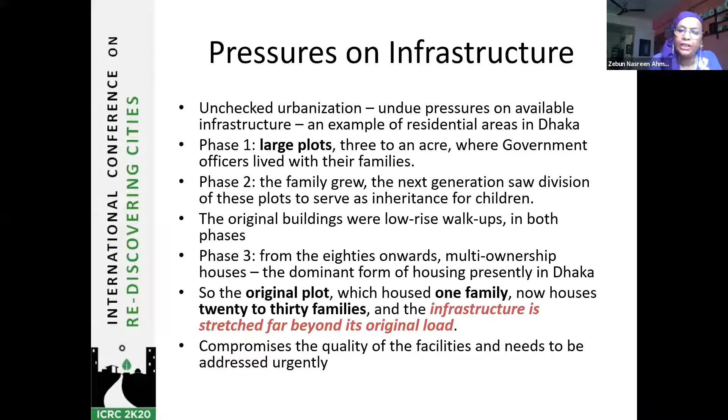In a way, we've been working on some research using the green plot ratio, which Singapore uses as a measure. It relates the building height, the floor area ratio, the ground coverage, and the population density to carbon dioxide emission. As we know, carbon dioxide emission is one of the big greenhouse gases, and it shows our sustainability and our vulnerability to environmental change. So unless checked, urbanization becomes a very significant part of spoiling our ecological balance.

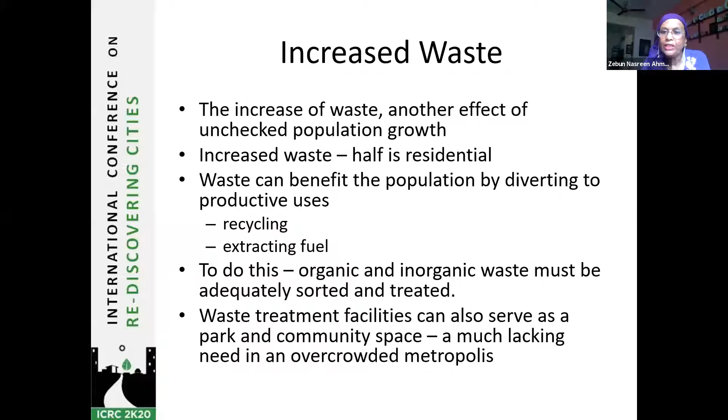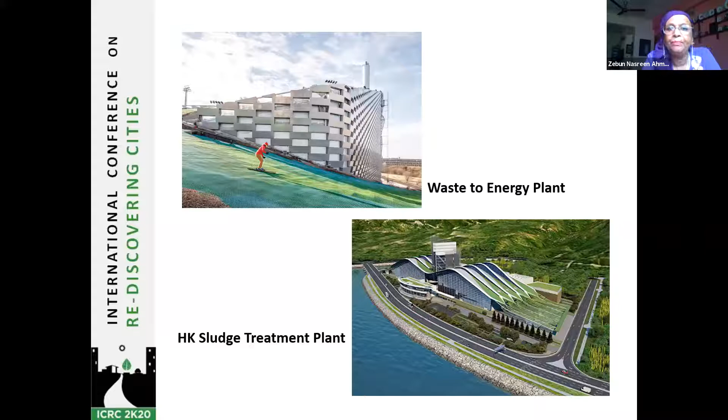Another thing we have to understand as a big challenge is raised expectations. With increased economic affordability, we have an increase of expectations. The result is that basic needs and comfort standards shift upwards and become more demanding, and this has enormous implications in terms of energy consumption.

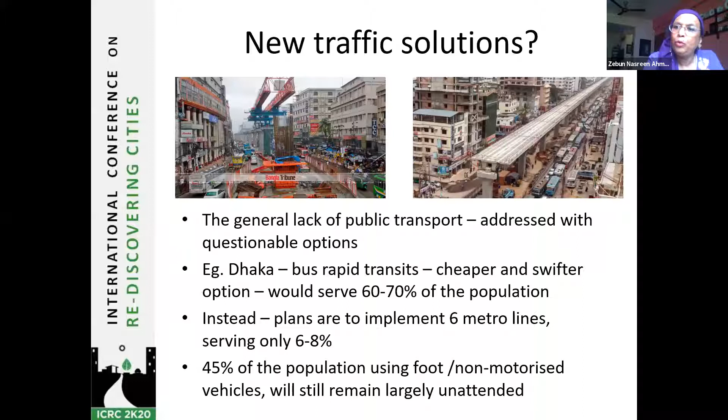Lots of researchers around Dhaka, in Bangladesh, are talking about these things. For example, in Dhaka we could do with bus rapid transits, which were a cheaper and swifter option and would serve about 60 to 70% of the population. Instead, what we are doing, we are planning to implement 6 metro lines, which will only serve 6 to 8% of the population. And 45% of our population still are foot or non-motorized vehicle users, and they will be totally unattended by this solution.

Look at the way we're addressing housing inequities. 65% of Dhaka's population are migrants. They come to Dhaka from places all around, and they make temporary makeshift kacha dwellings. This challenges the equitability among the populations.

At present, about 90% of Dhaka metropolitan region is identified as residential, because everybody is making these makeshift dwellings all over the place. And this is inequitable. How do we address these inequities?

We can't do it unless we have permanent high-rise residences instead of the kacha type to increase, and these permanent high-rise residences have to be affordable, available housing for low and moderate income groups, not only for the high income groups. And infrastructures and services have to be improved.

Financing mechanisms for housing need to be introduced. We still go for these plot type models, but we need block type housing concepts so that these infrastructures can be shared by concentrated structures, so that more open space is freed for other community users. We need pedestrian oriented development within easy access of public transport networks and community facilities. We need all this.

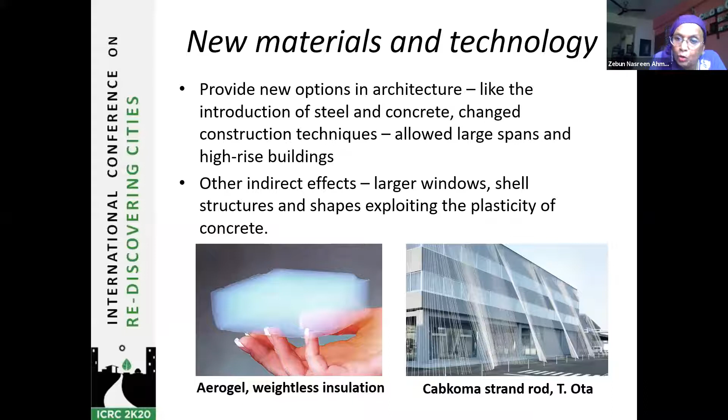Cabkoma is a strand rod, which is a Japanese invention, and this rod is so tensile - it's about 5 times lighter than steel and about 10 times stronger. This can actually provide a lot of earthquake support, which we all need. So these things will slowly come into our architecture and change the way our buildings look and also the way our buildings perform.

Changes in technology itself, digitization - what are we doing? It's introducing possibilities of parametric design. We're allowing natural phenomena to be predicted within unbuilt spaces and to be molded by them.

So we don't have to build them to find out our mistakes. Before they're built, we find out our mistakes and we correct them. Many building performance issues can be handled at the design stage, and this encourages energy efficiency and environmental sustainability.

Now with the COVID pandemic coming, we'll also have to make buildings germ-free. So these sorts of things will easily come, and soon we'll have new computer programs which will help us predict how vulnerable our spaces are.

Digital technology also offers another thing we have to remember: the rise of social media and avenues of protest. This is a key tool in participatory design. If we are designing something and it is not socially acceptable, it's going to be right out there in the media very soon. There's no way to hide. We must remember that.

New technology allows architects to depart from the conventions of pure form, which was the hallmark of modernism. We had these square, box-like solids, minimalism, and spaces which were very geometric. Now we have soft, undulating forms, and though we're using rigid materials, for instance the architecture of the late Zaha Hadid and Frank Gehry, you'll see lots of curves, but they're all using rigid materials.

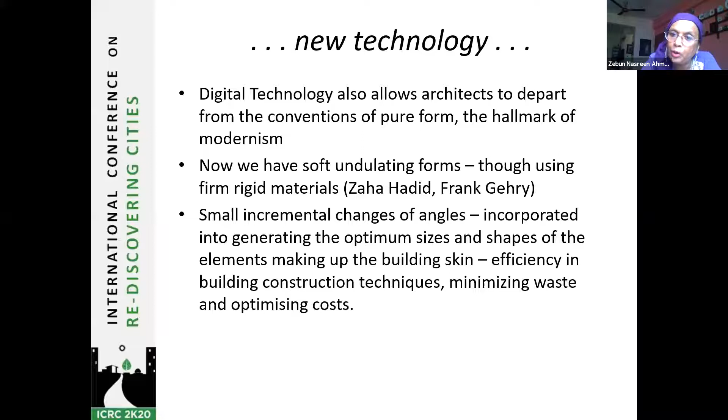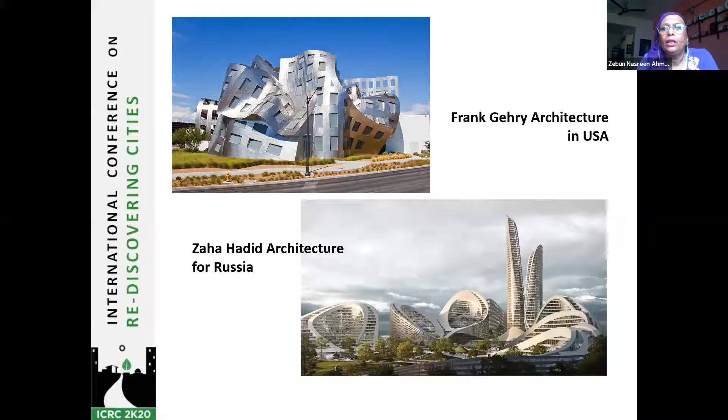Another thing to look at is mimicking nature. I'm a fan of Janine Benyus, who talked about how we have to learn from nature. Nature had and has 20 to 30 million organisms, and they survived and adapted well through 3.8 billion years of development and modifications, mutating when necessary, keeping themselves and the environment out of harm's way. This is the way nature grew and survived.

There's a lot of lesson to be learned from here. These must be observed and studied, and they can help us survive because nature survived. Why can't we survive without degrading our surroundings? We can do it, we have to look at nature. The concept of biomimicry came from there, and a lot of architects are now using this.

Michael Pawlyn comes to mind, and a lot. Biomimicry, we've seen, looks at a study of nature. Ken Yeang of Malaysia also did a lot about biomimicry. Study of nature, you look at it, you find out how nature addresses resource efficiency. From that standpoint, you emulate those principles into construction techniques. You don't imitate nature.

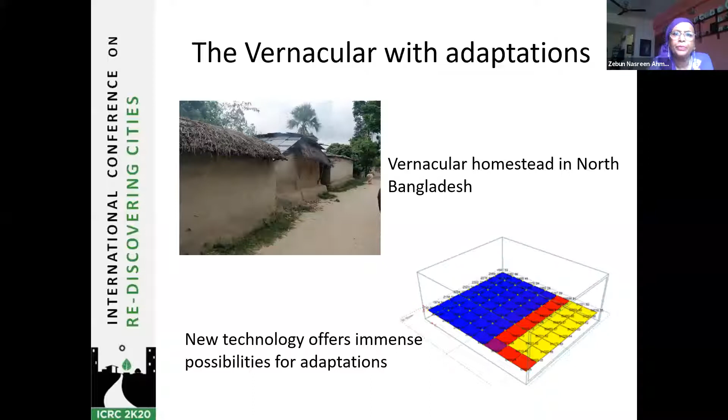Okay, so I've come almost to the end of my paper. I think I have 5 more minutes, and I'll try to make it short. This paper has discussed the present state of development, how we treat our cities and strive towards expansionism.

Clearly, there has to be a limit to this growth. We've made our share of mistakes in urbanism, but there are also things we've done which can be treated as rays of hope. We need to look towards a brighter future, full of new innovations, technology, and material. And we also need to remind ourselves of the past. We can't do it without the past, how we once had the capacity to cope with challenges despite all the challenges.

So I've tried to broadly and briefly mention key present day challenges and what our responses should be conceptually. I'm not talking about exact figures. I'm talking about a conceptual approach.

Our coping mechanisms, if I want to sum them up, are first, learn from nature, respect it, live with it. Do not compete against it. Definitely not. Number 2, we need a participatory design approach. We'll use those principles, we'll involve all stakeholders along with gender equity, and this is one of the hallmarks of sustainability.

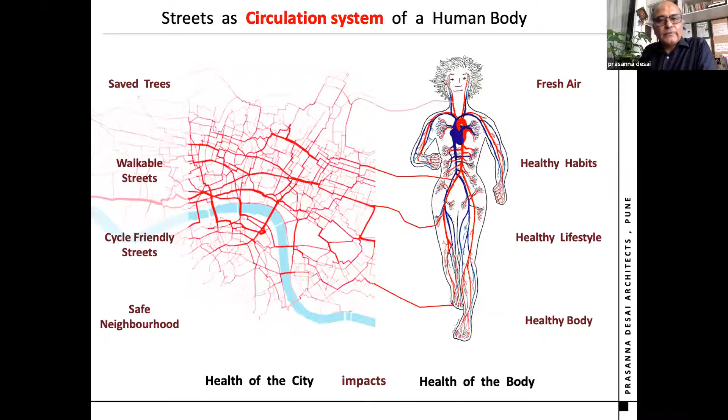The city looks like this, with the streets around, the roads and the street, which consume almost 15 to 20% of the open space. And this can be compared as the arteries of the human body. So if you look at saved trees, they give you fresh air. Walkable streets give you healthy habits. Cycle-friendly streets give you healthy lifestyle. Safe neighborhood gives you a healthy body. Health becomes very critical - this is the way our arteries, the streets, look like.

The urban milieu, we may call it congestion, we may call it mixed traffic conditions. Seven years ago, everyone saw Delhi's air take a deadly U-turn, but nobody did anything. These are studies from almost 10 years ago. Leave Delhi aside, this is what we are doing to our cities. The current situation has also brought us to a thinking point.

That is Sunita Narain, who talks about many solutions which exist but are not implemented for our cities. We must re-examine our norms for quality of life, said Ratan Tata, about four months ago at one of the first webinars during this pandemic. Points to ponder: a developed country is not a place where the poor have cars, it is a place where the rich use public transport. That is Enrique Peñalosa, three times mayor of Bogota. Cities have been taken over by motor vehicles, and they need to be returned to the people.

This is a very simple four-pointer. What kind of a city do we want? Where my daughter and grandmother can walk and cross roads alone in the evening. Where I have all my daily needs within walkable distance of home. Where I share space as equal citizens with all others - that is equity of space. I think Dr. Ahmed was also talking about equity of space in a city. And a city which I am proud of, for its beauty, quietness, and civility.

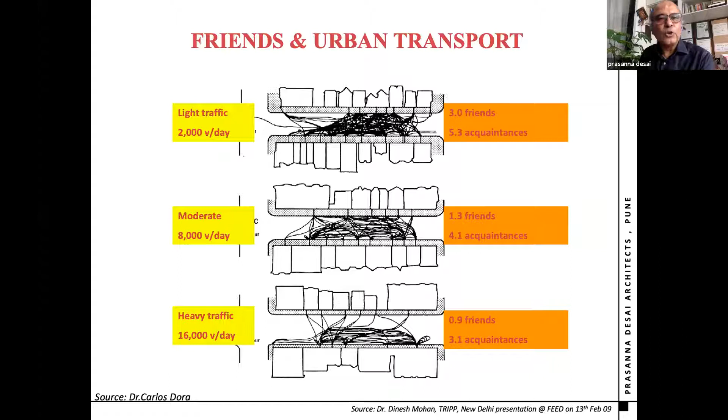Bhutan is the only country in the world which talks about gross national happiness, and it is much more important than the GDP, which we normally use to count the growth of countries.

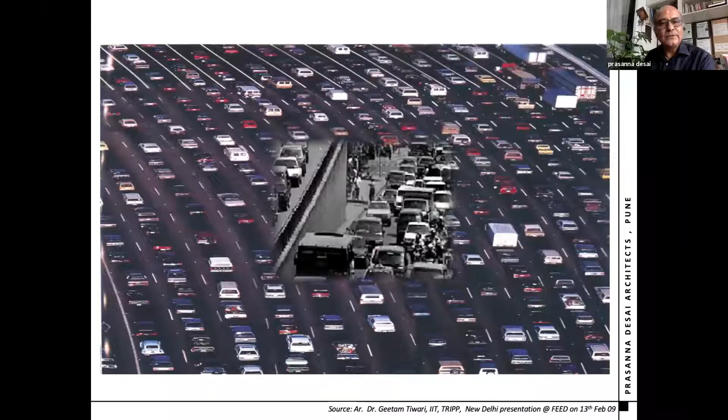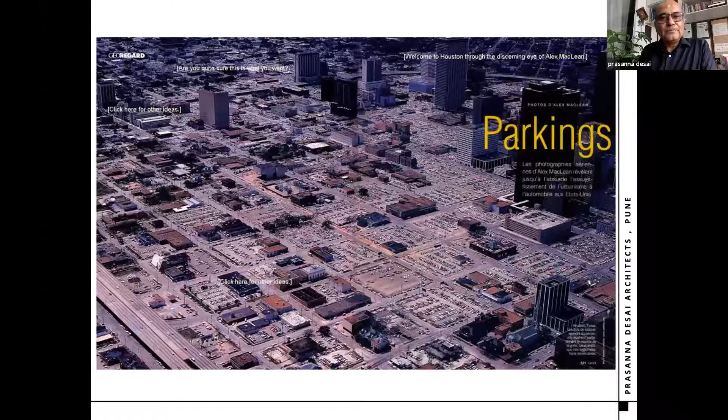Enjoy the car - you can keep on building this, but does it really solve the problem, that is the issue. You can keep on adding lanes, but your space for people will keep reducing within the neighborhood and within the city. Parking will consume almost half the space if you want that to be promoted. Lewis Mumford said building more roads is like loosening your belt when you're getting fat. If you plan cities for cars and traffic, you get car traffic. If you plan cities for people and places, you will get people and places, said Fred Kent.

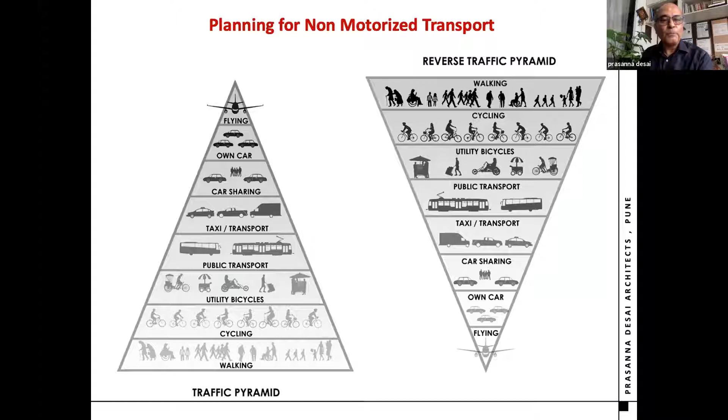Simple logic: for planning public and non-motorized transport, the reverse pyramid has to happen. Flying may be the top priority today and walking the last - can it be reversed, is the question. The pedal, the pedestrian and public transport is what the solution is. The 3P solution, as we call it.

Healthy cities consist of safety, shade and society. Let us look at safety.

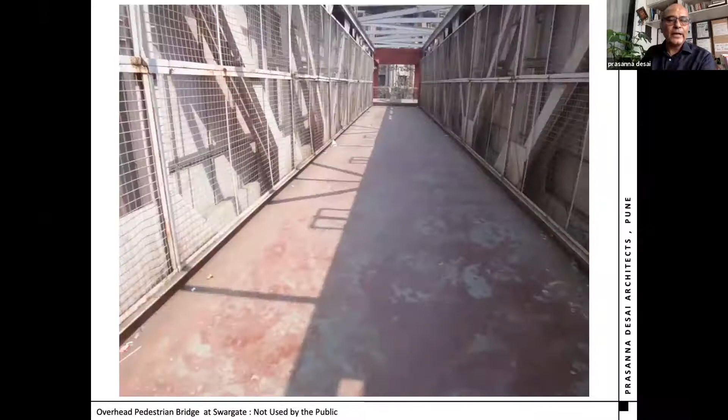Inconvenience is always there. Climbing up this is extremely uncomfortable. Building foot over bridges is actually making car movement more convenient and putting people into inconvenience. At grade crossings are the best world over. You will see hardly anybody using these, but we keep on spending on this kind of infrastructure.

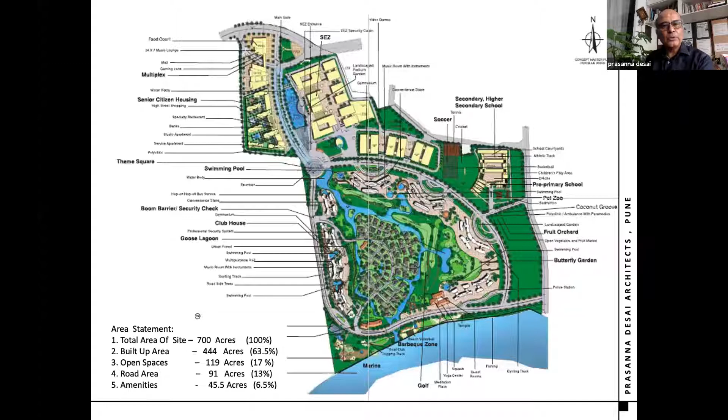So if that is so, that means we are on the same page. And if we are on the same page, these are the site plans of all these townships, which are being built in the last decade or so. And if the townships are supposed to have these facilities, my question is very simple.

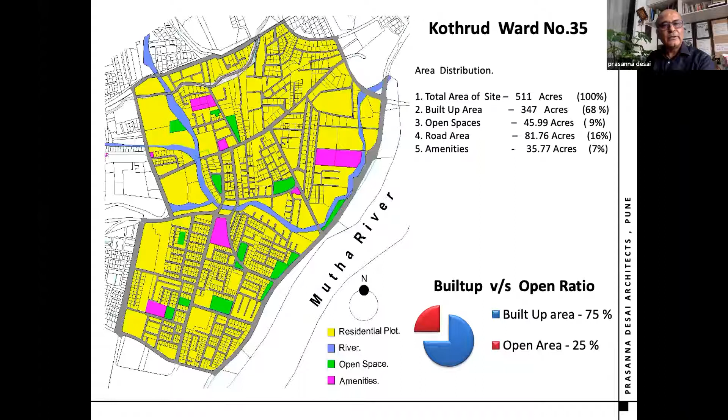Why not a ward or a neighborhood which is walkable, cyclable, has a museum, a garden, a library, a gym? If every neighborhood becomes sustainable and self-sufficient, I think we'll have better quality of life. This is a comparative we did between the builders' townships and a ward.

We are trying to take this project to the corporator, the politician. The project was called Project Dasha to Project Disha. Disha in Hindi means direction. What direction will we take? Because we have to be positive and give solutions - there's no point in cribbing and only criticizing. Disha project is a demonstration of integrated, safe, habitable, affordable solutions for neighborhoods.

How to change the Dasha, the present condition of your neighborhood, is simple - 4 steps: data collection, design, discuss. Dr. Ahmed was also talking about people's participation, and that is very, very important. And in the end, demonstrate.

If we put in street lighting, garbage management, trees, walking, cycling, public transport, handicap access, vendors, kattas and open public spaces, our property values will go up, safety will go up, health will go up, social interaction will go up, pollution will go down, and fuel consumption will go down. This will bring qualitative, economic, and environmental changes.

Leading to creation of healthy, hygienic, habitable neighborhoods. The 11 number bus is extremely important to connect communities - 11 number bus means the walking and the cycling. A street has all these components.

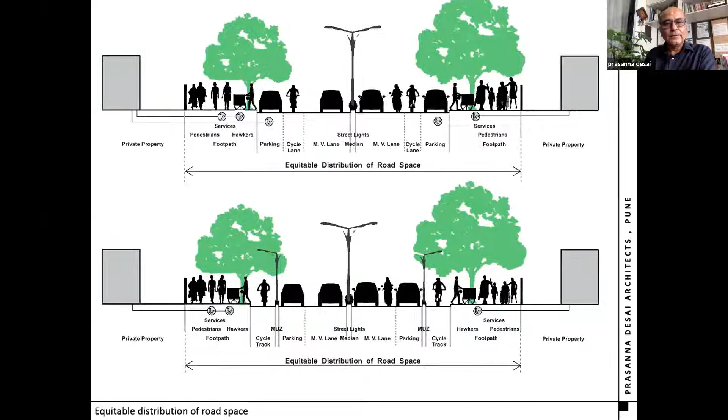Coming back to this slide, which enforces that yes, we can do it with these principles. Our journey of demonstration started in Aundh almost 10 to 12 years ago, in 3 stages. The first stage was with a hoarding like this coming up, where the politician declared he wanted to beautify the street at a cost of 1 crore.

We gave him a proposal along with local NGOs saying the street could be designed like this in the public interest, and we told him that if he designs it like this, we're sure he will win the elections. The next day we started with chalk, marking directly on the street with no working drawings, nothing - one tactical urbanism on the street.

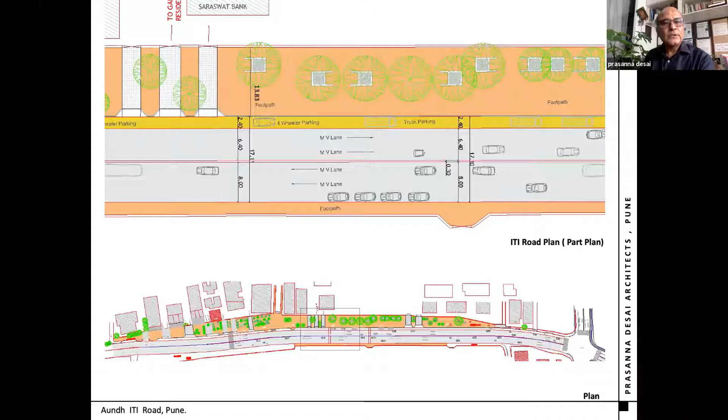After people's discussions, many discussions, we joined the points of the minimum width available, and 17 meter to 17 meter sections were joined together, with whatever was left created as a public realm. The section was such that we had on one side almost 14 meters of public realm, while saving all the trees.

Though this was only 500 meters, I think a bottom-up approach is the only way to do it - the footpath at the same level so we can walk. People's responses are the most important in this - what do people say? And if people are with you, then you can keep executing this part by part.

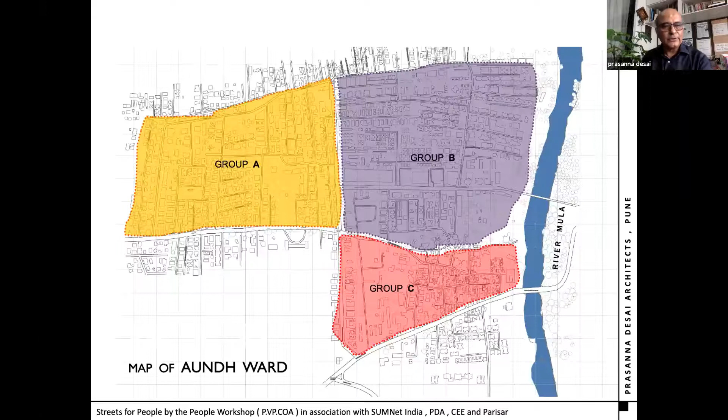Stage 2 was taking it ahead into the neighborhood, taking up these 3 sectors together with the help of students from PVP College of Architecture and many NGOs like Parisar and SUMNet. We started a journey of expanding this - a workshop was held, discussions were held with citizens, and a public exhibition happened on the same street.

From this discussion came a resolution along with the politician that we would expand this into the neighborhood and make a better network for a healthy environment, for the people, by the people. The neighborhood journey stage 3 started after 6 years, though that 3-sector demonstration did not happen.

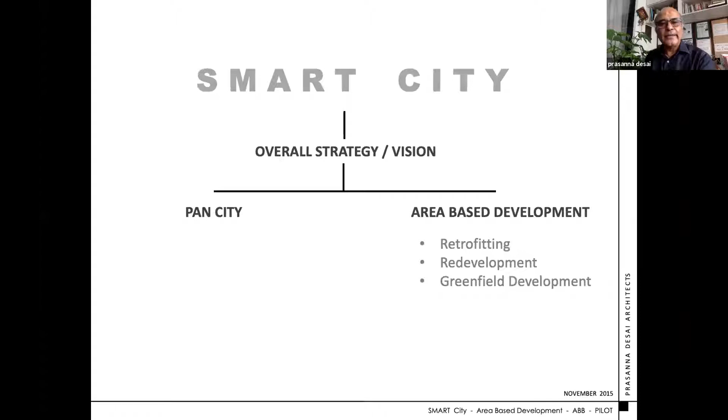Now came the opportunity of the smart city mission, and somehow the same area was chosen as a demonstrative area for area-based development. People, policy, participation, platform, and patience are the key to any live demonstration that one wants to do.

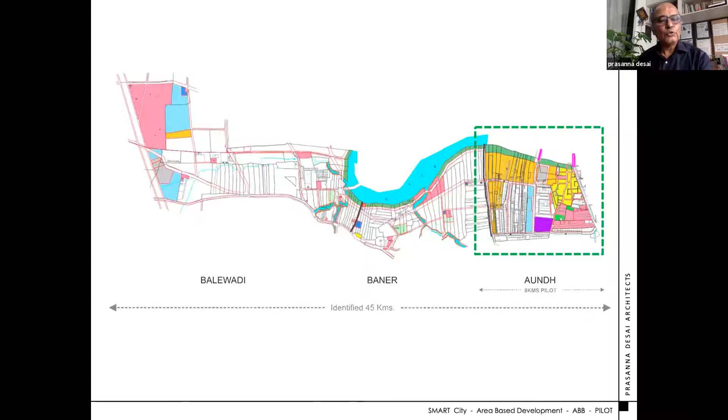The key plan of the Baner Balewadi area and the zone of Aundh, where we were asked to do one street as a pilot. The red one that you see, horizontal parallel to your screen, S1, was the one which was chosen. We convinced the commissioner and the team that we can start off with one street, but let us make a complete network of 9 streets.

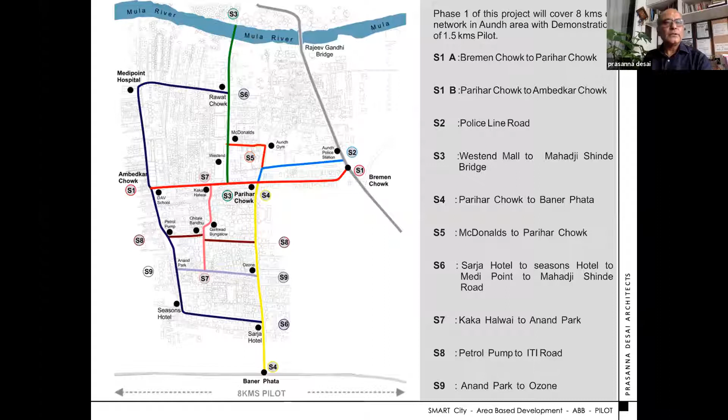So you can see these 9 streets which were marked S1 to S9, though we started execution of the first street and the design. The strategy again was design, discuss, and demonstrate.

The points to be incorporated, which we got vetted from the commissioner and the corporation and the people, were priorities: walkability with equity and dignity, universal accessibility, safe and cycle-friendly environment, hawkers and vendors policy, neighborhood level transport, organized parking with a policy for parking, creating a people-friendly realm, and incorporating technology.

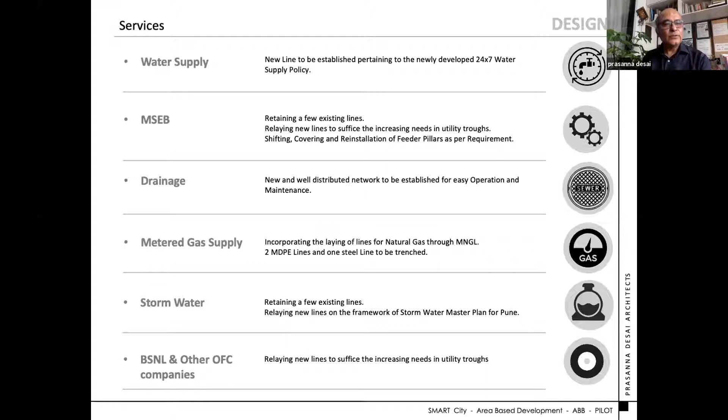With these points we started the process. Obviously the others followed, like water supply, MSEB, drainage, the systems which normally are taken care of. But the first part mentioned here has never been a priority in Indian cities.

Street furniture, signage, public art, and recreation space were also set as priorities. Facade material texture as an urban design exercise was also listed down, but we were not able to achieve much as far as execution was concerned in this realm.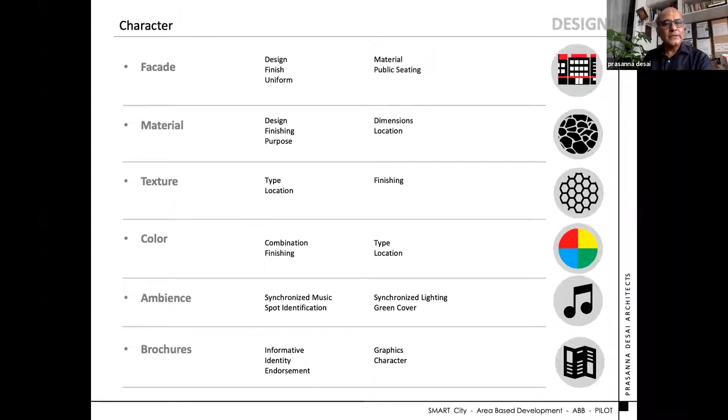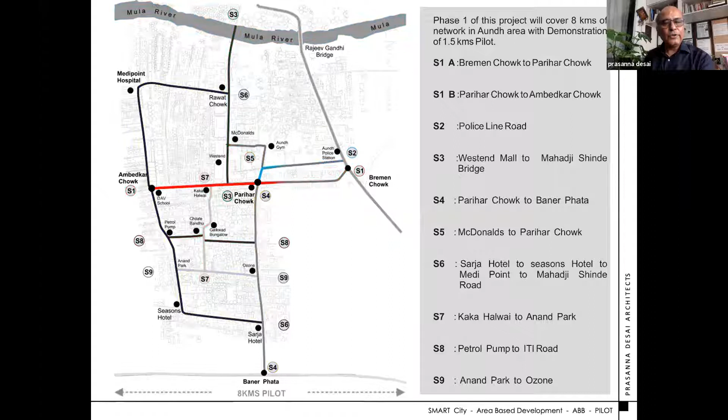The design proposal of the street, the red street S1, had two alternatives. The first alternative had parking. This is the existing scenario: parking on both sides, the street in the center, and footpaths on both sides.

So this was the first alternative, where we had a street, parking, and a cycle track which was not segregated but painted, along with the pedestrian footpath. That was alternative one.

In the second alternative, the street on the left was completely converted into a pedestrian plaza. The right was made one way, and a loop available at the back side was used for re-regulating traffic. This was supposed to be a permanent solution so that we have a public realm, since this street has a lot of shops and activity.

The other side of the street had a similar solution, with parking on both sides and pedestrian and MB lanes. A lot of public discussions happened.

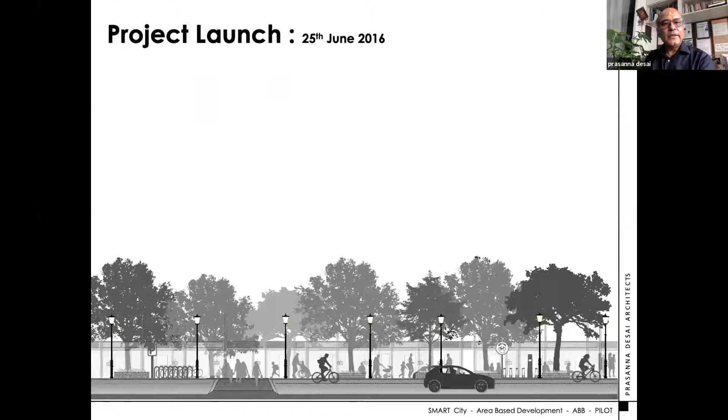Both designs were put in discussion with the people, with a lot of deliberation and many ifs and buts. The local corporator, the local member of parliament, the engineers, and citizens all participated, and we made a model of this street.

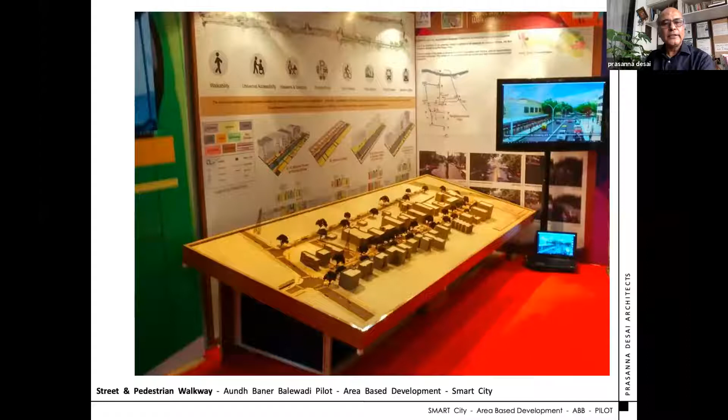This street model was also presented at the first anniversary of the Smart City Mission, which was launched and inaugurated by the Honorable Prime Minister. Then the project was set to start.

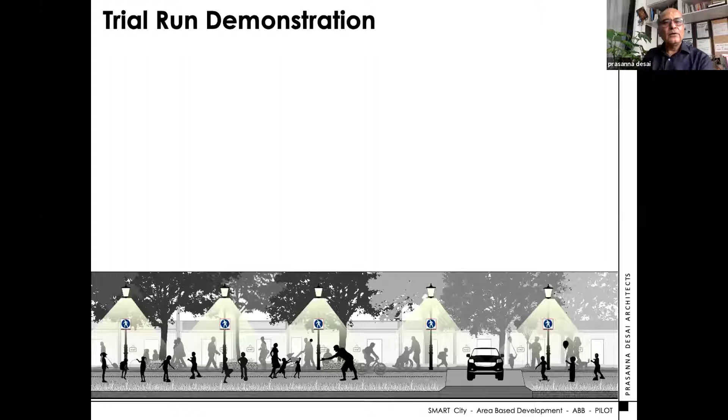But before starting, we thought we must test the left-hand side, the pedestrianization and closing of the street. So a one-week trial run was done, and before it, public discussions were held with all shopkeepers, citizens, and a meeting.

It was titled Healthy Aundh. Aundh is the local name. In Marathi, the local language: Ata aple angan, ab aapka angan, now your courtyard. The Aundh as a neighborhood is your courtyard - this is what we were trying to put across.

Healthy for us, at that time, we took to the people as habits, ecology, amenities, lifestyle, technology, heritage, and above all, you. The people are important, and that's why the Y is in red.

A lot of posters were made with the help of CEE, Center for Environment Education, Parisar, and ITDP. As Dr. Ahmed again said, it is collaborative, not an individual work at all. I may be presenting this, but you can see the logos on top: Pune Municipal Corporation, Smart City Limited, and people.

So this was the invitation, and a number of posters were made like this: U-turn for mobility, cycle friendly cities, 11 number bus, DP Road walking plaza. How do you improvise and take care of a complete neighborhood beyond one particular street?

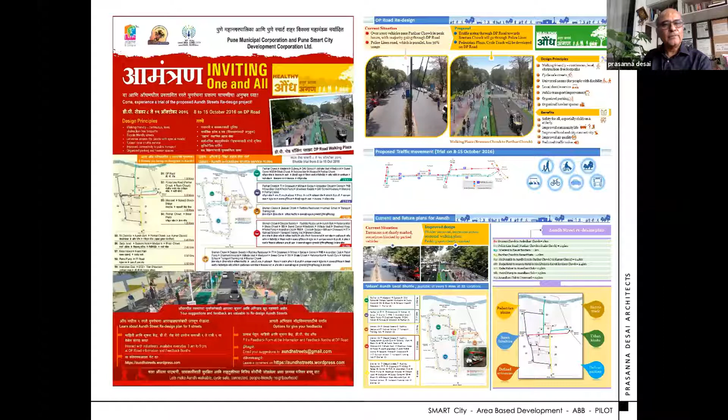We also introduced what was called UDAN. The name now sounds very good, but we deliberated and some 30 names were identified before finally UDAN was put in. What is UDAN? UDAN is a local transport system, like this.

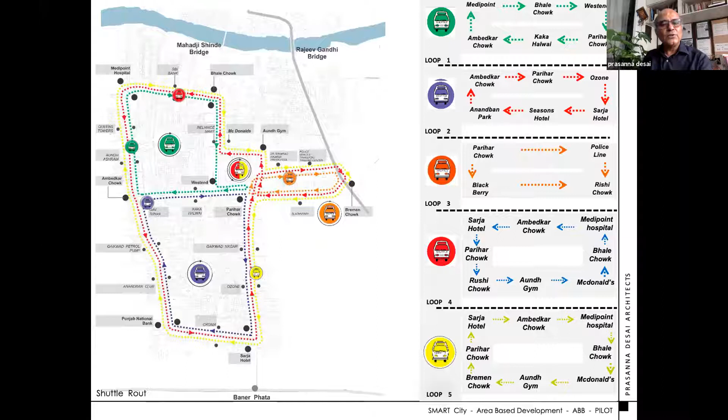So you have the green service, blue service, orange service, red service, and the yellow service, which is available at a frequency within the neighborhood. So my father, my mother, or anybody else can go within 1 to 2 to 3 kilometers using this. It looks like a hop-on hop-off, quick and on a loop on your mobile: green loop, red loop, orange and blue loop. These were the kind of signage, nameplates or boards we made and put across, and we worked out the timings also.

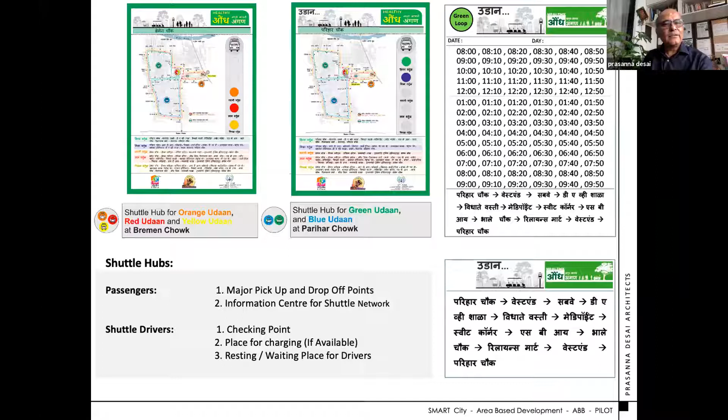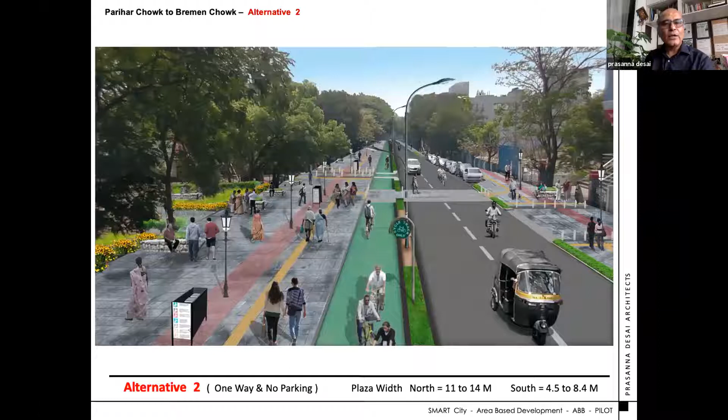So the trial run started from 8th October to 15th October, and this is how it was converted, 24 hours, 7 days, on that particular street. One doesn't have to say anything, one only has to see the visuals of how it changed the lives from the toddlers to the senior citizens.

There were mixed reactions, a lot of positives and some negatives too. The wheelchair came back, the senior citizens, the cycles, and the Udaan in a different form, because we could not get permission for that kind of Udaan. People in the end were very happy, and senior citizens said you may do anything but please don't stop Udaan. But till today Udaan has not happened because it requires certain RTO permissions and different kind of working. We are hopeful this will happen, but many other things have happened.

When it closed, one always looked at it that the future lies with these youngsters who are always looking for innovations. The process of implementation started after this, and the criteria included the wheelchair. At that time the Sugamya Bharat Abhiyan was on, where universal accessibility had to become part of every design, helping to pull luggage trolleys, pram backs, and shopping carts. The idea was that if the neighborhood has this, the shopping cart can be moved on one level of the footpath, then we don't have to take out cars for shorter distances, and I can put heavy stuff into the cart and move around. That was the dream.

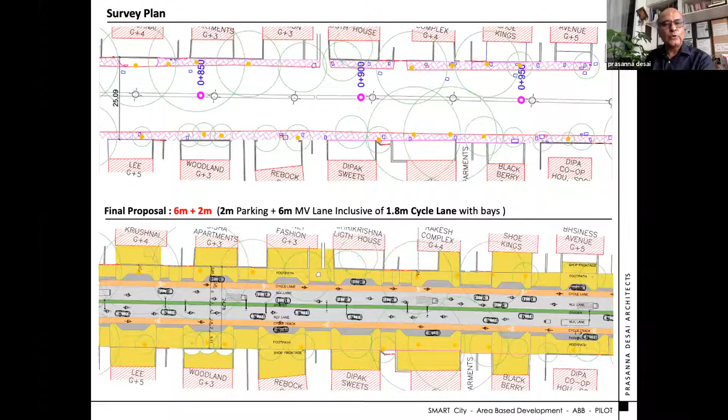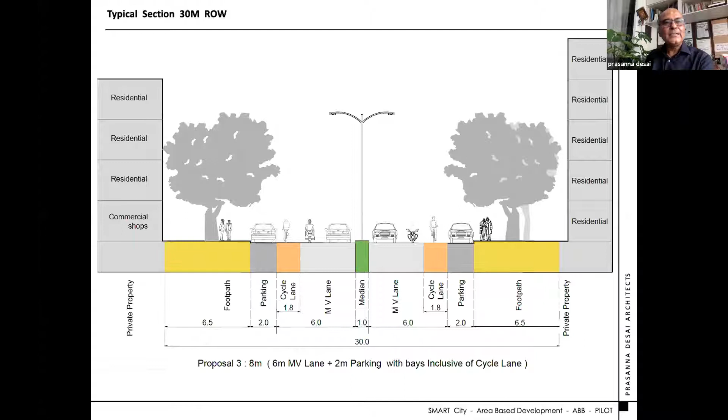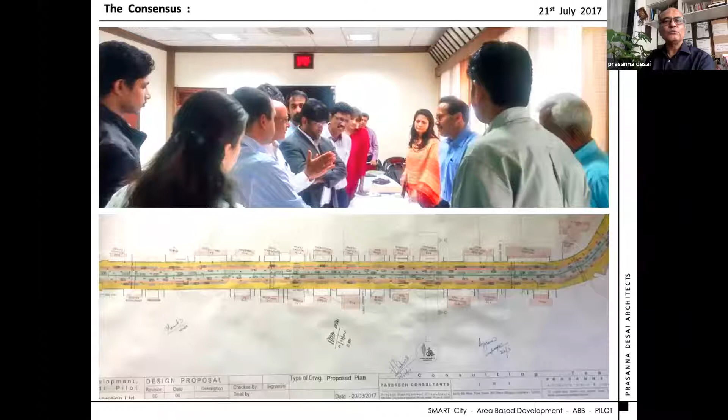Public discussion happened for the third time before implementation, to take people into confidence. And this was the street. Though only the alternative one was implemented, we could convince the shopkeepers. You can see the yellow going right till inside the shop - we could ask them to surrender all the frontages, so the footpath became almost 6 to 8 to 10 meters wide at locations. This section's yellow expanded right till the boundary or the shop, giving easy accessibility. Then we worked out all the services, and the final drawing was endorsed by the Honorable Commissioner and the full system, signed and okayed for implementation. This proposal was adopted.

18 elements were incorporated, and I will run through them quickly. I have 13 minutes still to go.

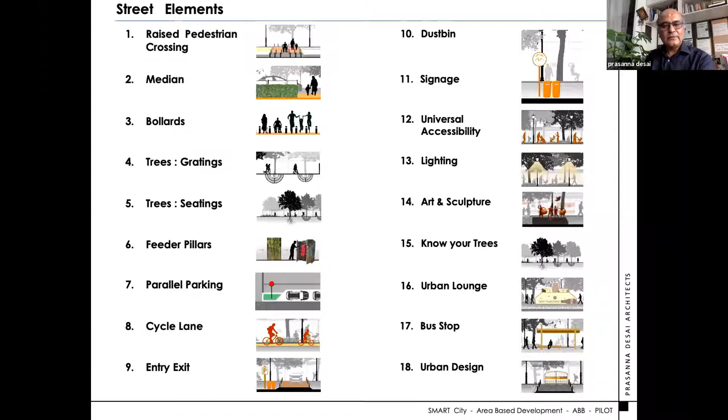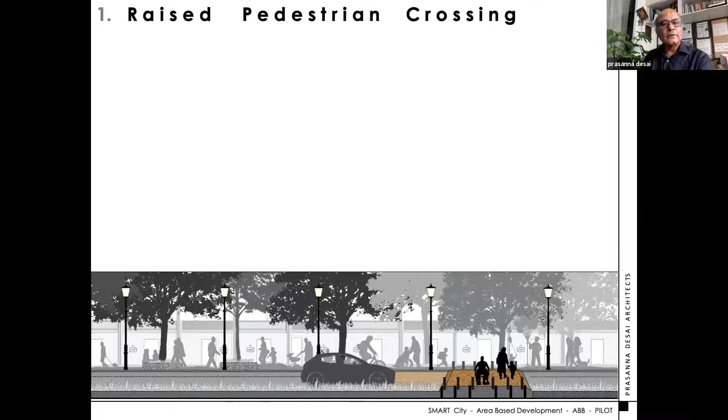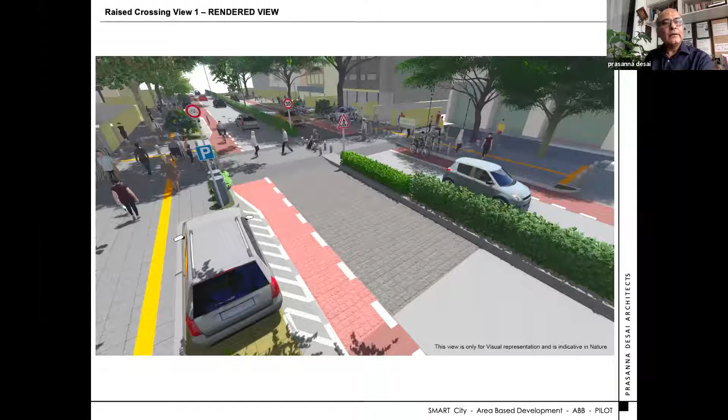Raised pedestrian crossing - this is now pure design, where the role of architects, urban designers, and qualified professionals comes in. This is how our raised pedestrian crossings are designed. Speed breakers kill, causing 30 crashes and 9 deaths in a day. How do you redesign this? We said why can't we have a stone rumble strip before the raised crossing, like this? This is done all over Europe in old cities, to reduce speed before you reach the raised crossing. It took effort to convince the system to get it executed, but we managed to get it executed in place. A lot of objections, a lot of deliberations, but this has been in place for the last 3 years and is working reasonably well.

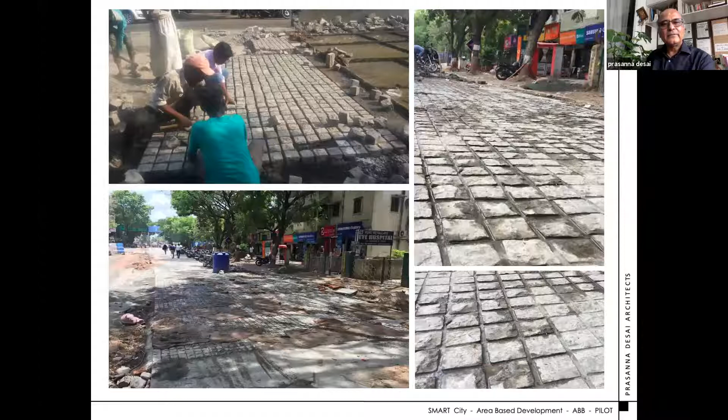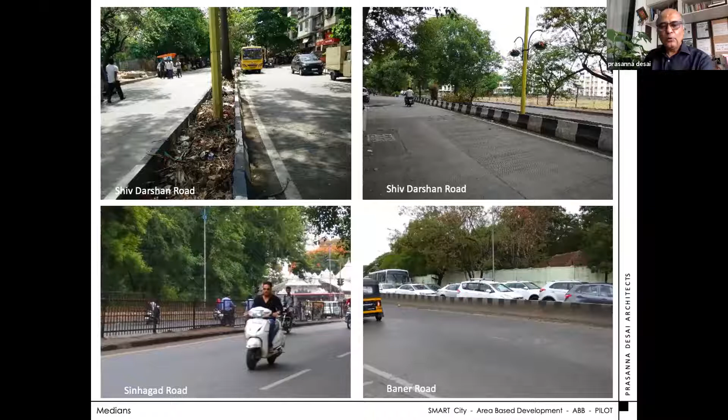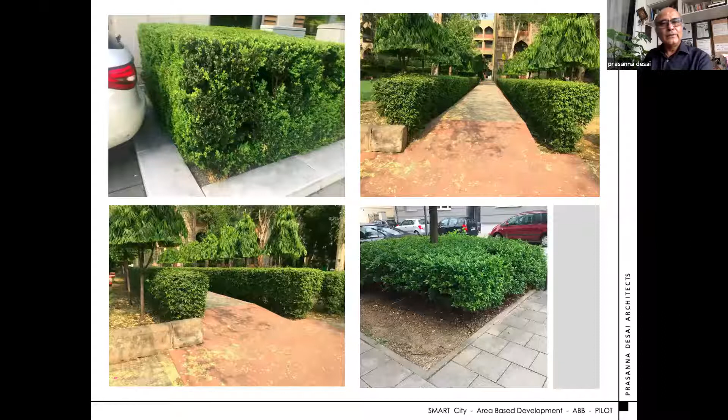The hedges - how do you make them? The question raised was that it will take time for this to grow, and people will cross in between, and I think that question was very right. So to get this will take time, but that is what was proposed, and we did a little research: why can't we have a mesh in between with the divider happening? We got everybody on board, including the execution team, and put that in. This is how the divider looks - in the early days it has taken this shape, after a while it looks like this, and in the lockdown it is looking like that.

I know it needs trimming because it's almost coming onto the street, but this is how the public realm can completely change. I always say small things can be adopted throughout the city. These were the experiments we did, and we hope this may not be the only solution, there could be many other solutions too, but experimentation is very important.

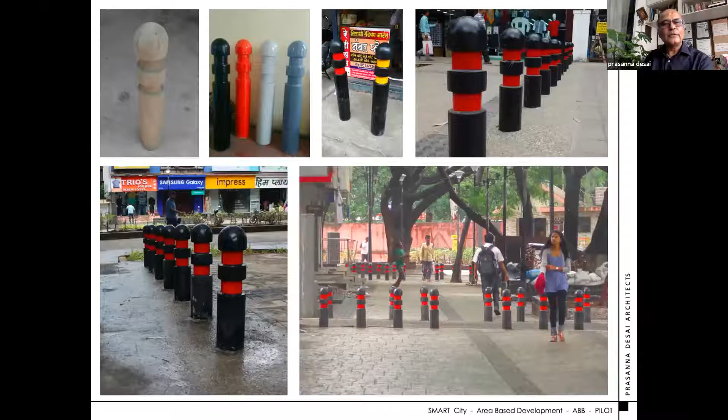Bollards, no rocket science, but they are made out of stainless steel at times, which leads to pilferage, people taking them away and selling them. So how do you fix this? The distances between bollards are not appropriate. We came out with concrete bollards with reflectors, placed with a distance so that motorcycles don't cross, but wheelchairs can move through.

Tree gratings is again no rocket science, but we don't have proper tree gratings in place. Our trees finally have this kind of finishes at ground level. Steel gratings out of steel or any other material are not appropriate. So cast them in concrete and get the gratings in place, giving dignity to the trees is extremely important.

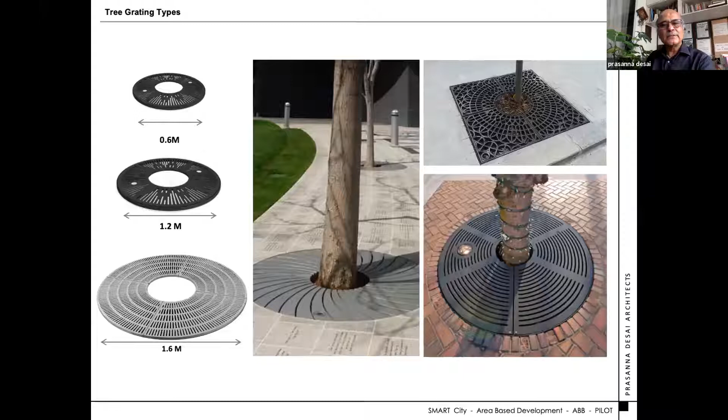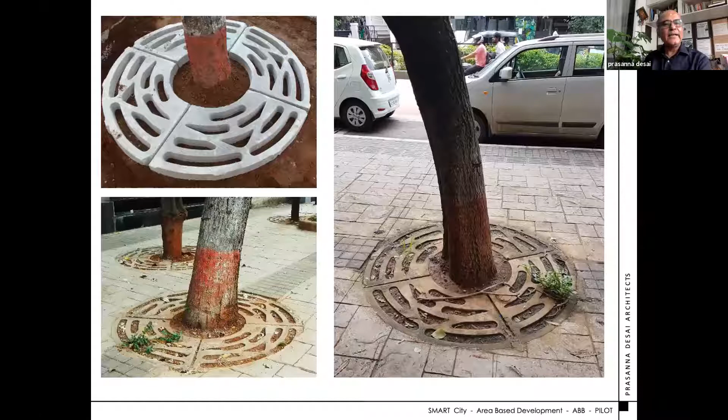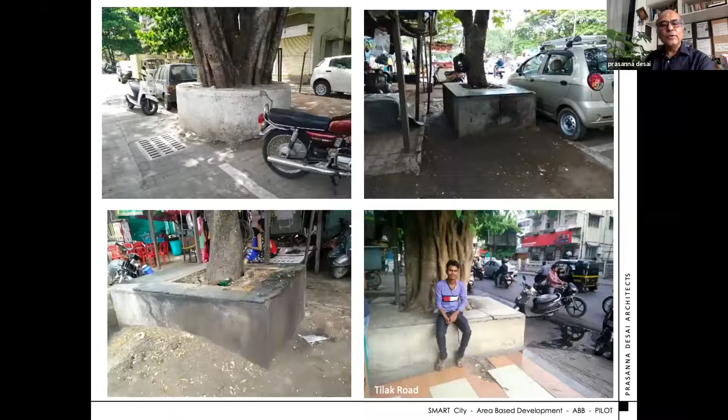Tree sittings at times are like this, varying heights, such a short distance between the tree and the edge, no earth there, no breathing space. Should we allow better breathing spaces? With a lot of detail and deliberation, we almost put it to 2 meter by 2 meter and got in stone to have the sitting around it.

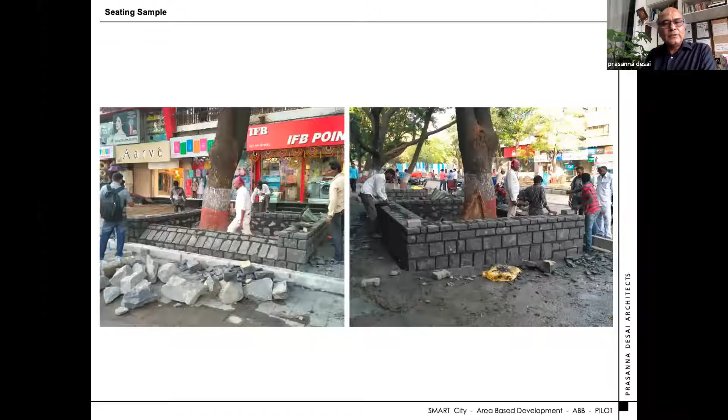It was again difficult to get the stone in, but using local material and local craft, we were able to convince and get the stone seatings around the trees. That is how it looks once executed. There are some 150 trees on these streets and 35 varieties. We saved each and every tree on this street. That is what the public realm started becoming.

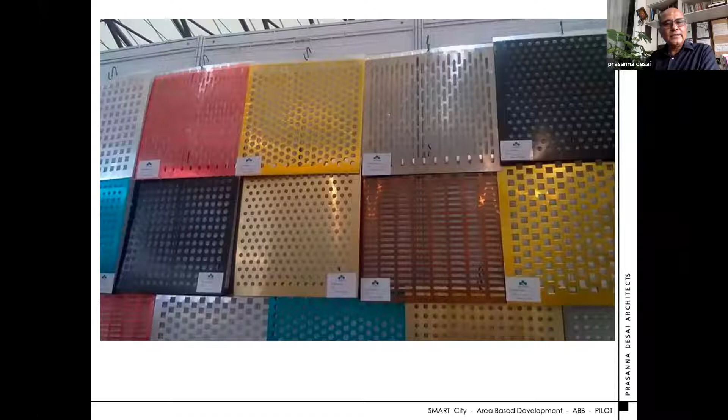Parking also needs to be charged. It is a public space, and public space parking cannot be free. Like in malls, we pay for parking. For streets, you should be paying quite a lot of charges, and the charges need to be telescopic. So the first hour could be 10 rupees, second hour 20 rupees, third hour 30 rupees.

Our research showed shopkeepers were quite concerned about parking availability for their customers. But what we found was people in the morning come, park here because it is free, take a chartered bus and go to their companies, and come back in the evening. So virtually the car is parked throughout the day for free, and shoppers who come during the daytime don't find any parking space. So paying for parking has become very important, and the policy is under process, and I hope it will come through.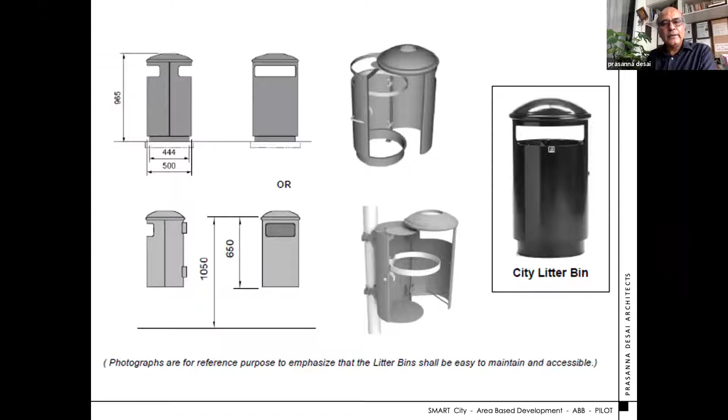This pedestrian footpath, as was explored in the very first example in Aundh 10 years ago, was put on one level using the Universal Accessibility Act as a tool of law. At the entrances, you see these small entrance niches with green area, which also take care of the dustbins or the poles, so you don't have to drill or dig into the pavement anywhere.

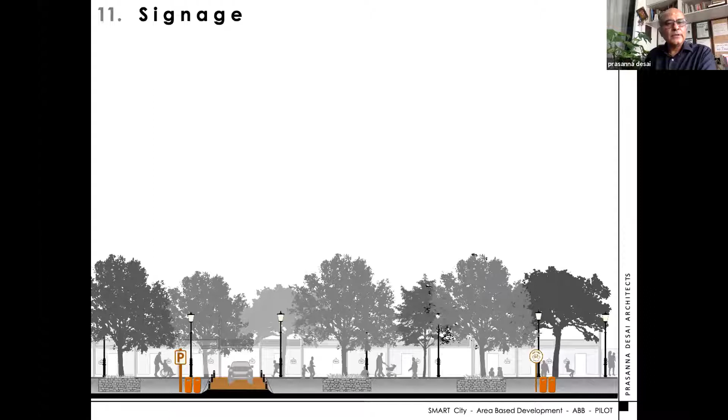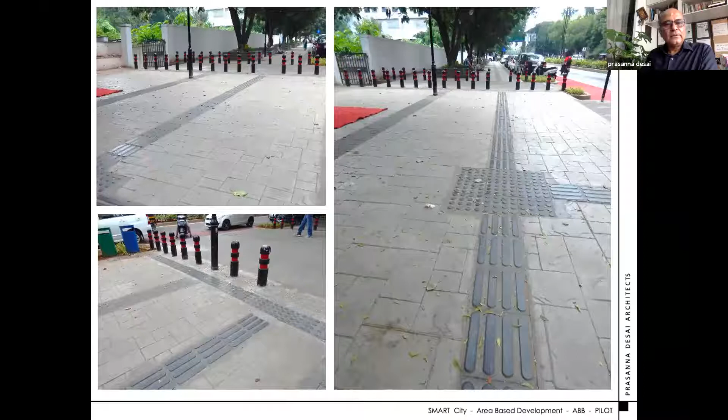The same signages come into these entry points, soft areas. Universal accessibility, tactile paving - the wheelchair is back. This is what we have seen over the last 3 years. The gap is exactly the same for any handicapped person or wheelchair to move. This has also led to trolley bags back - if I want to go for a kilometer, I don't have to take out a car or ask my father or son to drop me to a bus stop. I can just roll the trolley bag. This will reduce the number of trips on the street and also the parking mess that we have.

This is the documentation that my office keeps doing over the years. One might wonder about this pram - such a wonderful thing, shopping inside a mall free of car space. This is a similar space over here. The footpath being wide, it is a pedestrian realm, the prams are back, and you can look at the happy couple there. Finally, that is what society is all about.

Lighting on the street - the question was raised by a local politician: you are widening the street and footpath so much, but if you don't have good lighting, it could be dangerous at times. Yes, he was absolutely right. But we provided for lighting, and that is how the whole street looks now.

Art and sculpture was put in by the Pune Biennale Foundation. These are sculptures made out of junk, created during the Biennale, and they were brought back and installed over here.

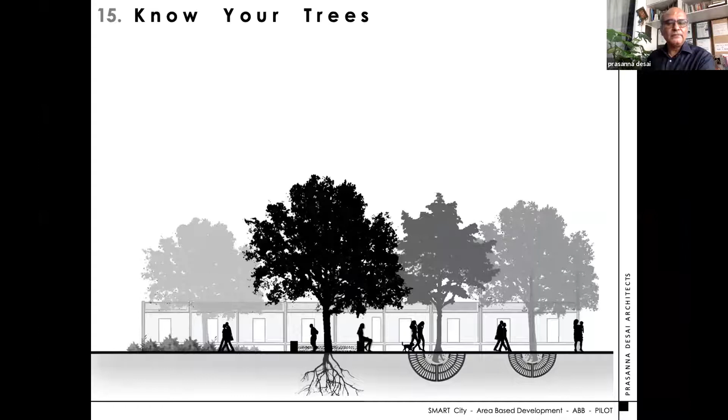Games on the street, like snakes and ladders. Know your trees - as I said earlier, there were some 35 species on this street, so we thought if we could bring this knowledge base to children and anyone on the street, they could read about what the tree is all about. It is in Marathi and English, so this could become a botany class for school children. If a family is coming, the children can read this, or the parents can read it out while the wife or husband is in the shop - somebody can help us, and this could become an interesting live botany class.

Urban lounge is the toilet - toilets on the street accommodated in a designer way, which can be sponsored by some companies. But yes, this has not happened as of yet. We hope this will come through, but it needs a very strong sense of management.

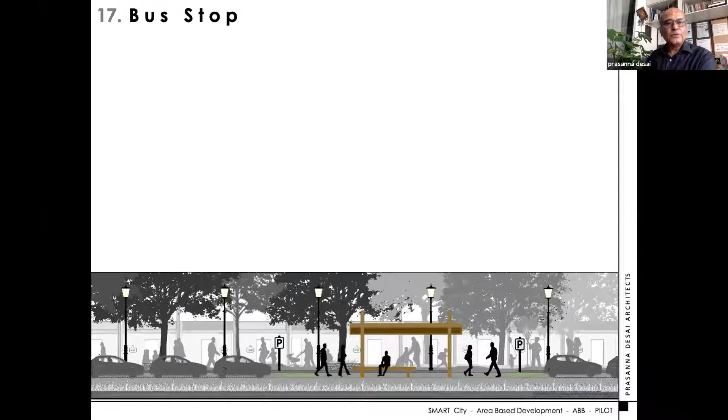Bus stops, which normally block the streets, need to be very sleek so that you can virtually walk through the bus stops. That is what was designed and planned for.

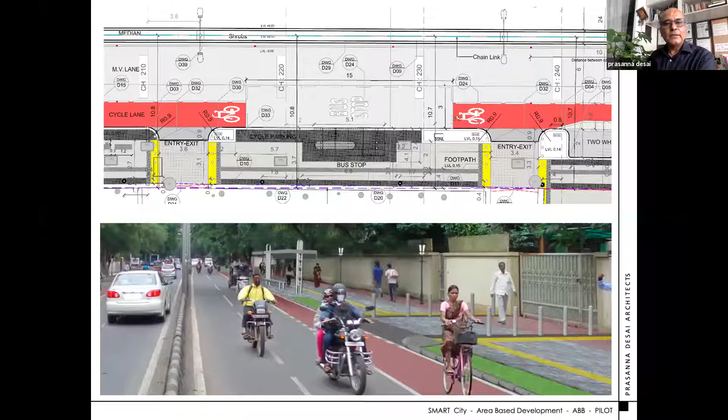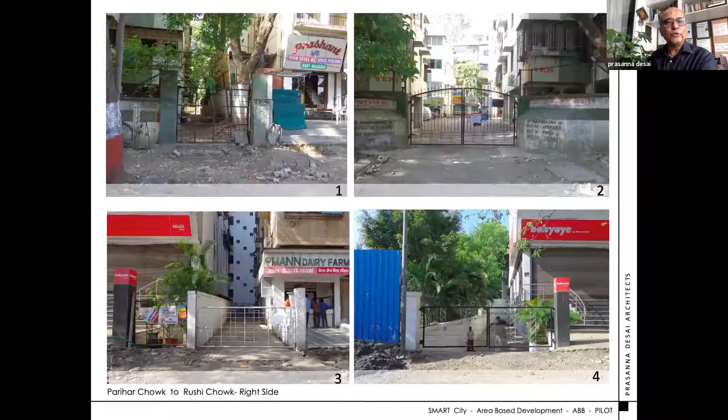There are many gates like this. We were told, let's dismantle these gates and put uniform gates all around. We said that is not sustainable at all, and the gates don't look bad - let us have some uniform design policy instead. So we marked all these gates, put them together, created a system and a mark, and said we'll just paint it black and put stickers around so we have uniformity. We talk about sustainability, so we have to retrofit whatever we can - that is how it looks.

The street ambience - I will just run through these.

Now we are expanding this to another 5 kilometers within this neighborhood, and we hope that beyond the boundary we are talking about will become extremely active. Once this whole neighborhood becomes universally accessible, people will walk, people will take out their prams, and this will be replicated all over.

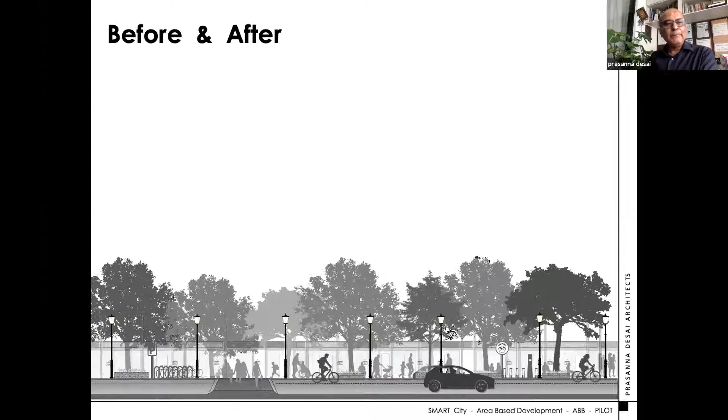This is before and after, which could be extremely critical for everyone and tells the complete story. You can see the front margins of the Bank of Maharashtra, which has now been merged with the footpath. It took us some effort to convince these shopkeepers to release their front margins, and in return we gave them direct access.

That is how we have been able to create the pedestrian realm. We have not reduced the width of the carriageway, though there is discussion because proportionately the footpath looks wider, people feel we reduced the carriageway. The carriageway has remained the same; it's only that shopkeepers surrendered their frontages, and that is how that has become a public realm. Look at the footpath which was up and down, the trees which never had soft areas around—that is the change.

This is the central image, that's how the street looks like. And somewhere we could really reclaim another 4-5 meters on the left hand side. This spot before and this spot after. We could get 4 meters as per the development plan line and acquire the property. This space also has completely become a large space. You can see what was in the private realm and what has now come into the public realm.

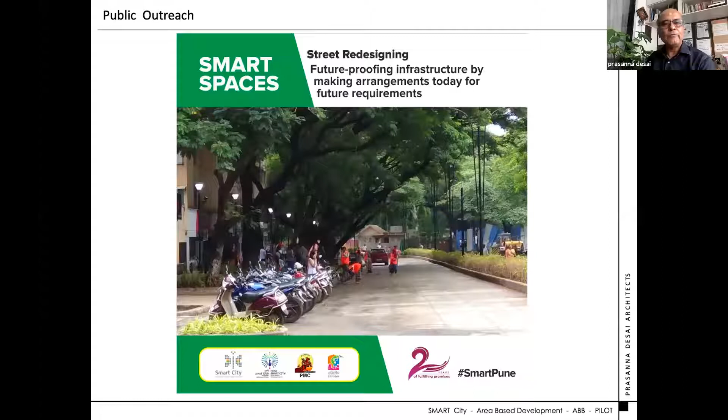Apart from citizens, obviously you always look for people coming and saying that you are doing it well. So this is what we termed 'the mall under the tree canopy.' That is what we call it, because the shopkeepers were extremely worried that they would lose their business. We were trying to tell them: what is the difference between a mall and this? A mall is a complete pedestrian space, and this is the pedestrian space we are giving you. A mall has charged parking, so we should charge the parking. A mall has an air-conditioned environment, and here it's air-conditioned the natural way. Currently malls are not open, but this street, this urban mall, the tree canopy, is open for people. So I hope this will bring change.

As I said, finally you also need some kind of a pat on the back. We are extremely happy to have Mr. Doshi on this street, looking at it and appreciating the work that was done.

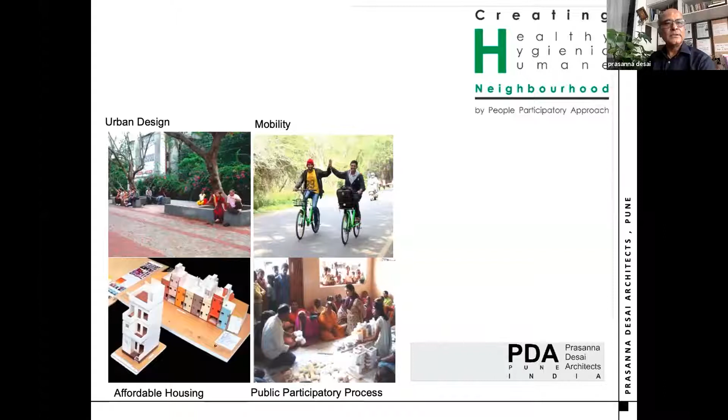Currently we are involved in cities—we work in urban design, mobility, a lot of work on affordable housing, all with public participatory processes. This is in terms of urban design, placemaking, open spaces, neighborhood upgradation. And in affordable housing, we have been doing housing for the poor. That is what I think a question was asked by someone.

And for the poor, if we want to create housing, then the policy at the government level has to be in place. Housing for the poor cannot be created by the private sector. It has to become a government policy. Then only the poor will be accommodated.

This was a BSUP slum upgradation program, on the left-hand side you see how slums can get a facelift, which we did almost 5 years ago, where around 1,200 houses were built and upgraded in an existing slum without demolishing a single house.

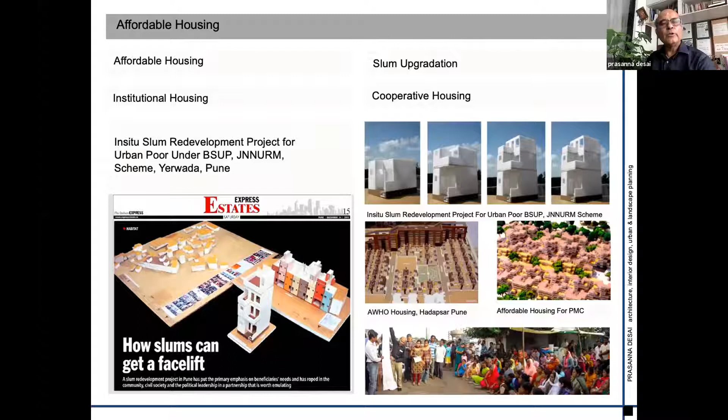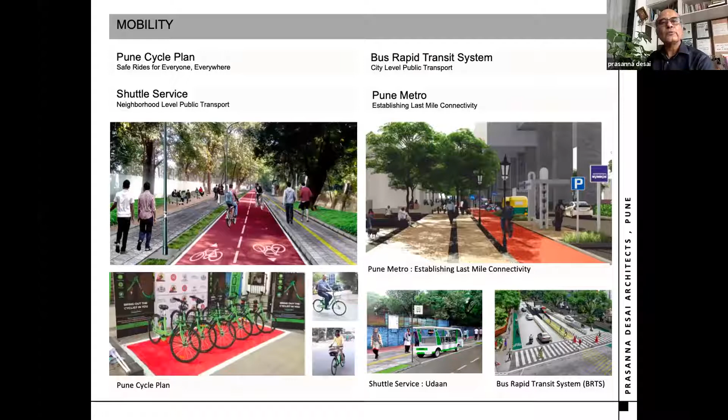What I need to say at the end is, healthy, hygienic, humane neighborhoods can only happen when we start designing beyond the boundary with a people participatory approach. The boundaries need to be broken. Today we have all gated communities. Gated communities existed for a long time, but today the criteria of a gated community has completely changed. So I think we need to look slightly beyond this, open up the boundaries within professions, within multidisciplinary approaches, open up the boundaries with discussion with people, politicians, bureaucrats, and the citizens, and the journey continues. Thank you very much. Thank you for your patient hearing.